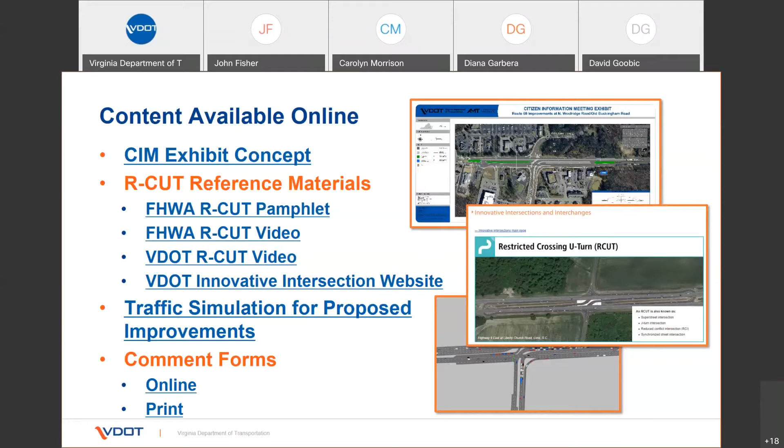Our project is located in Chesterfield County at the intersection of Route 60, Old Buckingham Road, and North Woolridge Road. We are proposing to improve the existing intersection by constructing a signalized restricted crossing U-turn, or RCUT. The total project budget, including engineering, right-of-way, utility relocation, and construction, is $13.2 million. If you send us an email, please include either the UPC or state project number so we can make sure the email is routed to the appropriate individual.

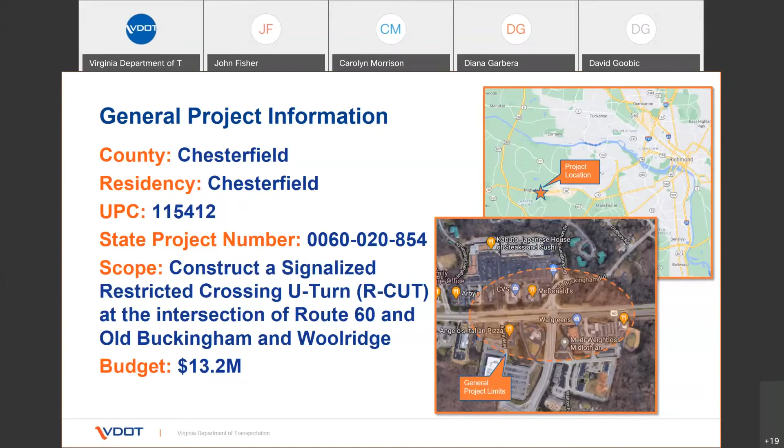Why are we proposing improvements for this intersection? This intersection already experiences frequent congestion, and there is an expectation that this will get worse. Woolridge Road at 288 will be connected to Old Hundred Road, and this will substantially increase the usage of this intersection. The intersection also ranks 15th in the Richmond District's 2018 ranking of the potential for safety improvements. There have been 116 crashes at this intersection between 2014 and 2018, and the majority of those crashes were rear-end collisions. This type of crash is typical for areas with traffic congestion.

Why did Chesterfield County and VDOT decide RCUT was the better choice for this location?

Out of the viable intersection modifications, the RCUT helps encourage the use of main roads, such as Route 60 east of the intersection. Old Buckingham was never designed to handle the large volume of cut-through traffic it currently experiences.

The RCUT also better supports the anticipated additional traffic expected from the southwestern portion of Chesterfield County that will travel past this area. We also considered the potential impacts to local businesses and determined the RCUT would have the least negative impacts over the alternatives.

The RCUT even provides a better gateway into the Midlothian village through the use of green space after the traffic signal.

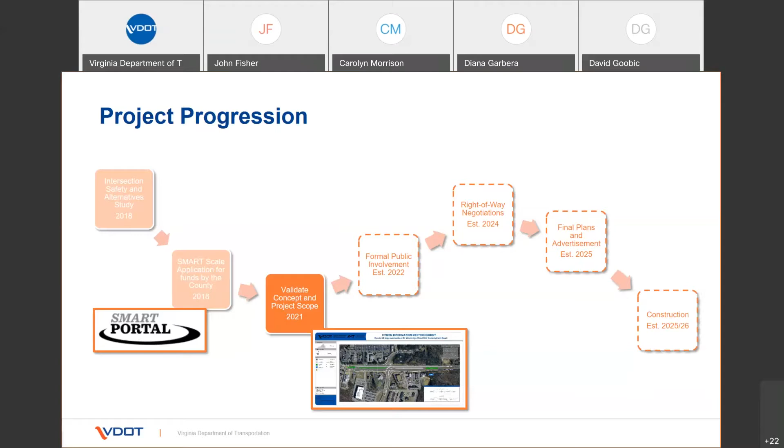What is an RCUT? The term RCUT is the abbreviation for Restricted Crossing U-Turn. This is an innovative intersection type where all side street movements begin with a right turn.

Why would we prefer this over conventional intersections? An RCUT has less crossing points than a conventional intersection, so it reduces the potential for vehicular impacts.

Also, by removing the side street left and straight movements, the number of signal phases drops from 8 to 2, resulting in increased efficiency for this intersection.

Increasing intersection efficiency also improves intersection safety because there will be less vehicles waiting to go, resulting in less rear-end collisions.

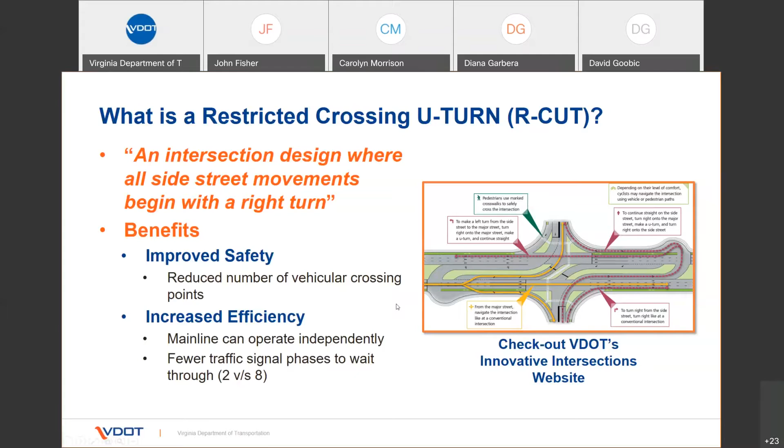So, what would change by installing an RCUT at this location? For the majority of the traffic movements, an RCUT intersection will function similar to a conventional intersection.

For example, Route 60 traffic traveling straight through the intersection will continue in a manner similar to a conventional intersection. Traffic on Route 60 turning both right and left onto Woolridge Road will travel in a manner similar to a conventional intersection.

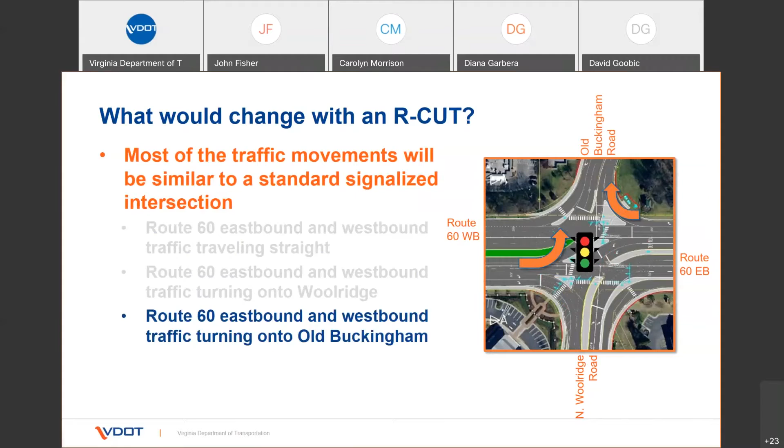Traffic on Route 60 turning both right and left onto Old Buckingham Road will also travel in a manner similar to a conventional intersection. And finally, traffic on Woolridge Road and Old Buckingham turning right onto Route 60 will travel in a manner similar to a conventional intersection.

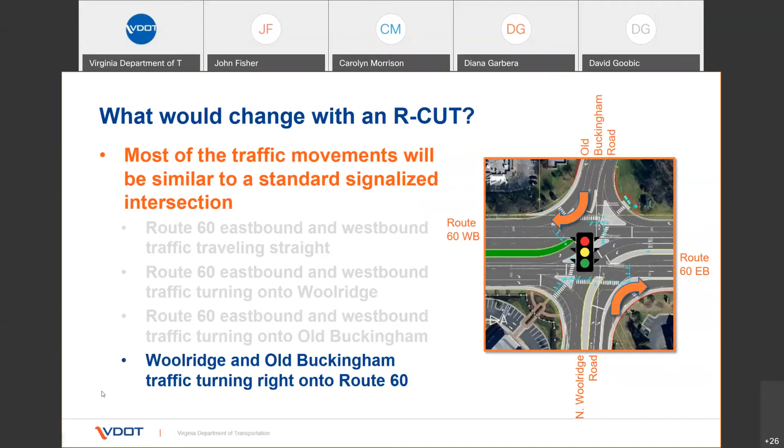As many of you have identified in your comments, there are still some differences. Traffic on Woolridge Road traveling straight through the intersection to Old Buckingham, and traffic turning left onto Route 60, will first turn right onto Route 60, then make a U-turn at a signalized U-turn immediately down the road. From there, traffic can turn right onto Old Buckingham or continue on to Route 60 westbound.

Also, traffic from Old Buckingham Road traveling straight through the intersection to Woolridge, and traffic turning left onto Route 60, will follow a similar pattern. The only difference is traffic from Old Buckingham will be heading west before making a U-turn at the signalized U-turn.

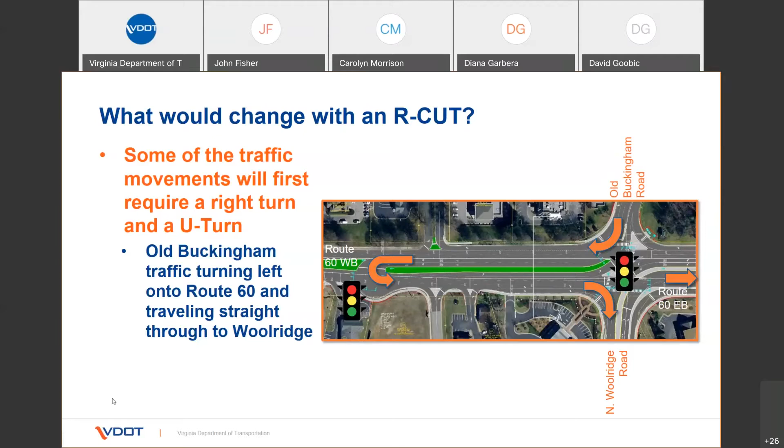So, how is an RCUT more efficient than a conventional intersection? A conventional intersection has 8 different traffic signal phases, so if you arrive at the intersection and watch the light turn red, there'll be at least 7 groups of traffic that you'll have to wait through before it's your turn again.

By removing the side street straight and left turn movements, the RCUT intersection only needs 2 traffic signal phases. Thus, traffic is able to move quicker, resulting in less time for you to wait before you get to go.

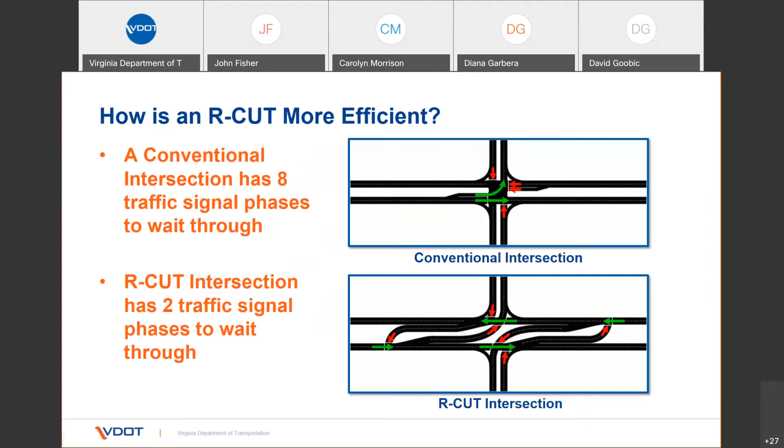As noted at the beginning of our presentation, we posted our CIM comment form on our project website, and we have received a lot of great feedback already. I would like to go over a few of the common questions as part of this presentation. I would also like to encourage everyone to visit the project web page to view the frequently asked questions for additional information.

Is an R-CUT really safer than a conventional intersection? This has been asked by many of you, and it is a great question. To help illustrate why, I would like to point out the two diagrams on the right.

As shown in the diagrams, a conventional intersection has 32 conflict points. Conflict points are where vehicles cross each other's paths, and this increases collision risk. The R-CUT intersection only has 18 conflict points, or half of the conflict points of a conventional intersection.

I would also like to remind everyone that the proposed U-turn movement at this location will be signalized. Thus, you will not be expected to make a U-turn into oncoming Route 60 traffic.

We also have a couple of examples of R-CUTs that have been constructed in other states. In both North Carolina and Maryland, improving the intersection with an R-CUT reduced the number of crashes and fatalities.

We understand that an R-CUT is a new type of intersection for Virginia, and there are concerns. We would like to point out that roundabouts were also a concern when they were new. Yet as people use them, drivers now are more familiar and have expressed their support.

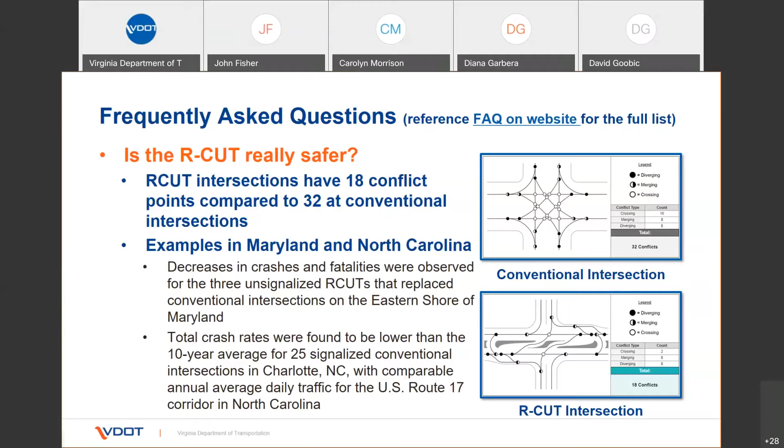How does this help the walkability of the Midlothian Village area? There are existing ramps at the current intersection corners, but no pedestrian crosswalk signals. Our proposed intersection will include crosswalks and pedestrian signals facilitating safer pedestrian movement through the intersection.

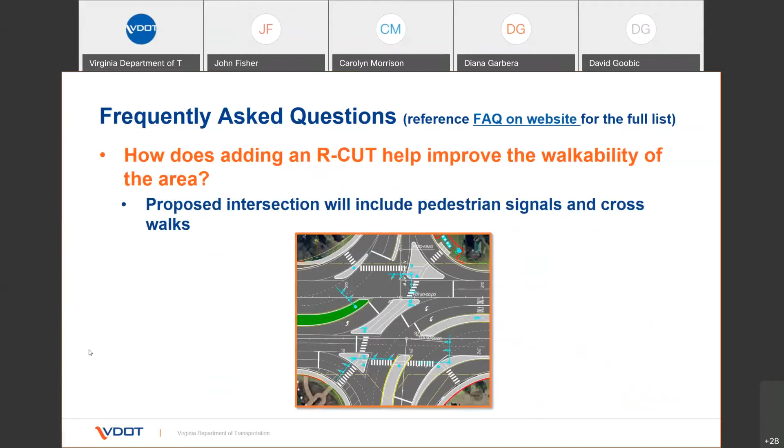How much longer will it take me to drive through this intersection? Because the traffic signal phases are reduced from 8 phases to 2 phases, the travel times are reduced for everyone during rush hour.

Outside of rush hour, traffic along Route 60 and traffic turning from Route 60 will still experience less travel time. Traffic from Woolridge and Old Buckingham traveling straight through the intersection or turning left may see a slight increase in travel time due to the increased distance, but will still benefit from the signal phasing reduction.

I would like to share the traffic simulation and ask everyone's patience while I switch screens.

As you can see on this video, the traffic signal phases facilitate movements through the intersection, including at the signalized U-turns, to decrease driver wait times.

As noted on the previous slide, this simulation is available on our project website for you to view at a later date.

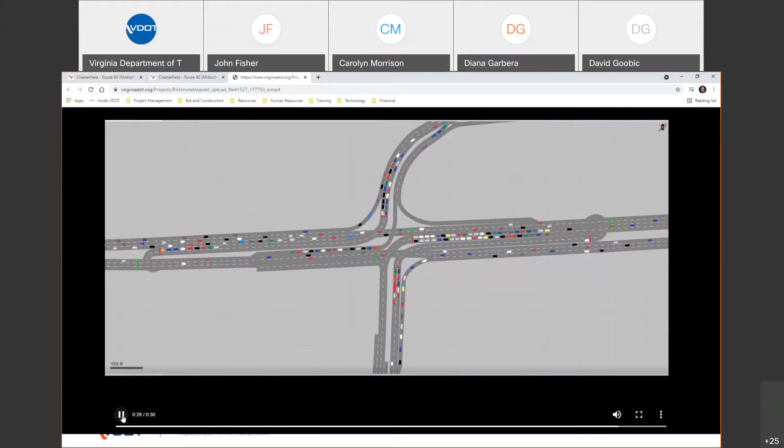How do I get to the village area businesses from Woolridge without having to use the RCUT? Including Lee Gordon Drive, there are currently 3 routes from Woolridge Road to Route 60 that avoid this intersection.

Before the RCUT construction begins, Grove Hill Road will be extended to Route 60 and Coalfield Station Lane will be connected to Grove Hill Road. This provides 2 additional routes to Route 60 from Woolridge Road, resulting in 5 separate routes that will be available.

When will construction take place? Construction is anticipated to start in 2025 and continue through 2026. Are long-term detours planned? None are anticipated at this time.

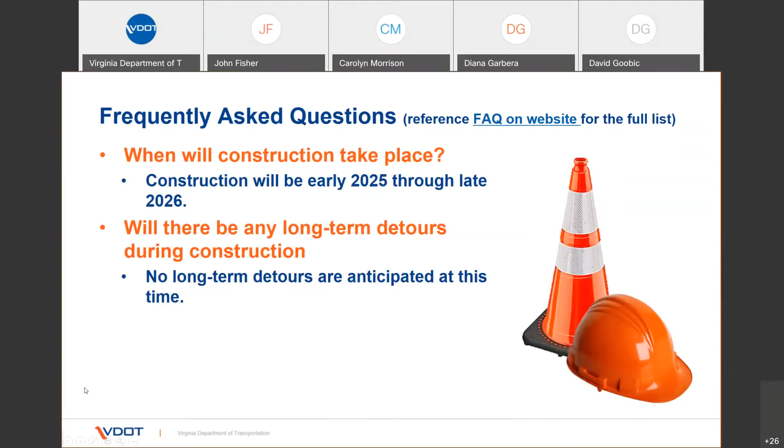I have a question about an area outside of the project limits. Please visit my.vdot.virginia.gov or call 1-800-FOR-ROAD to make the request.

Now, we would like to start our question and answer portion of today's meeting.

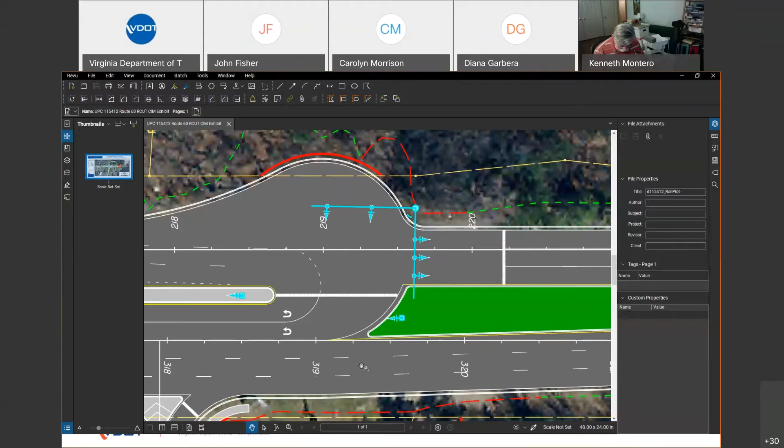There you go. So at this U-turn movement, this is the one east of the main intersection. The U-turn movement is signalized on both sides of the intersection. So you'd have a new traffic signal here, and then you would also have a traffic signal to stop 60 westbound traffic so that those vehicles could make that U-turn. So this traffic signal is really an additional one compared to a traditional intersection. You'd have the same on the other side, on the west side of the intersection, down at the other U-turn movement.

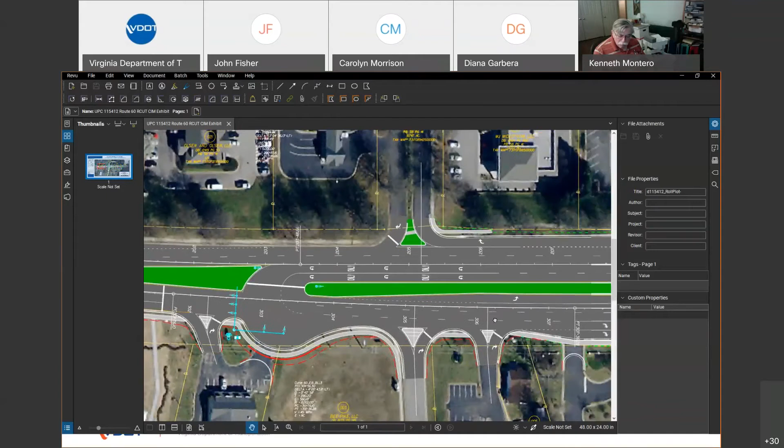And then we also have a dual signalized right turn lane from 60 eastbound to Woolridge southbound. You can show that one, Will. One reason we made this a signalized dual right instead of a free flow like the other three quadrants is the amount of traffic making this movement during the PM peak. What we found was there were so many vehicles.

Not only was there a long queue here, and that's why we made it a dual right turn lane, but there's a lot of weaving going on between - if we made it free flow - the vehicles coming 60 eastbound that want to then merge onto Woolridge southbound and eventually hang a left on Walton Park Road. There was a lot of weaving between those vehicles and the vehicles turning left from 60 westbound.

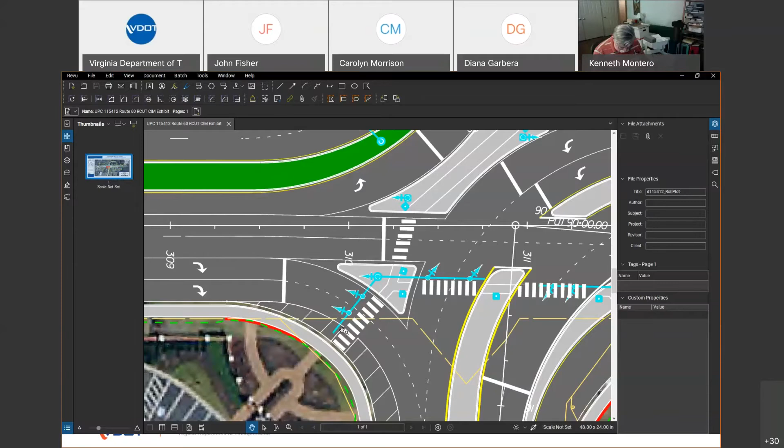So by signalizing this particular movement, this dual right turn lane, it allows a protected movement so that the vehicles from 60 eastbound to southbound Woolridge have an unobstructed movement to make a left turn either into our new left turn lane into Browns Way Road, which would be an entrance into the Walgreens shopping center, or to be able to merge over to the left to get into the dual left turn lane on Walton Park Road. So that was signalized really to protect the vehicles so that they wouldn't have to merge and cross over with the traffic coming from 60 westbound.

Thank you, Jeff. Becky, would you please ask the next question?

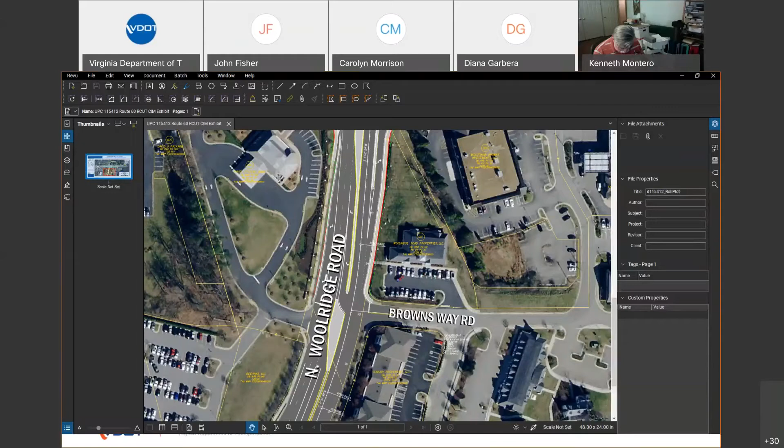If a pedestrian wanted to cross Midlothian Turnpike from the southwest corner by Walgreens and end up at the northwest corner by McDonald's, how many pedestrian-controlled signal buttons would they have to press? Are all sections of the crosswalk, including far right turning lanes, controlled by pedestrian signal buttons? What additional safety measures will be in place to keep pedestrians safe during their crossing?

That was a great question. I'd like to ask Jeff if he can help with that, please. And Jeff, if you need me to move the slide, please let me know. No, that's fine right there. So to get from one quadrant - I'll say the southeast quadrant - to the northwest quadrant, which would be the Walgreens quadrant, if you will, to McDonald's, there are 7 different crossings.

2 of them will be unsignalized, which would be the free flow right turn in the lower right-hand corner and the free flow right turn in the upper left-hand corner. That's 2 out of the 7. The other 5 movements are signalized.

So if you look down at the bottom of your screen, you'll see there'll be a push button actuation to get you across Woolridge northbound, another one to get you across from the dual lefts going Woolridge southbound, one that you'll have to cross 60 eastbound traffic - that's the 4th one altogether. And then you've got the long Z diagonal, if you will, in the middle of the intersection. And then you've got one that crosses westbound 60, another one that crosses Old Buckingham, and then an unsignalized one that gets you over to that other quadrant. So it is 7 traffic crossings total, and 5 of them will be signalized.

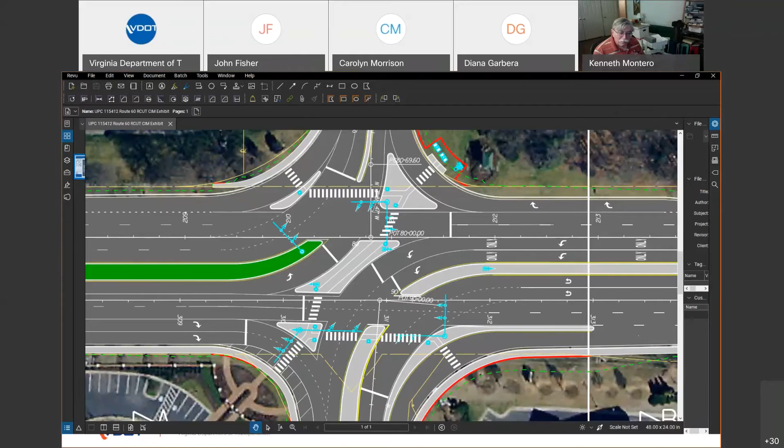Please share again the three additional ways to access Midlothian Turnpike headed westbound that you shared earlier. Also, is there a way to extend Walton Park Road at Woolridge to come out at Midlothian Turnpike westbound?

I believe this is the slide you're requesting we share. As far as extending Walton Park Road to Woolridge to come out at Midlothian Turnpike westbound, I'd like to ask Rebecca Worley to answer that. That's really out of the scope of this project, but there is a development project proposed in that southwest corner that would extend that Walton Park approach over to Grove Hill Road and would extend Grove Hill Road to come out and intersect Route 60. That development plan is called Coalfield Station.

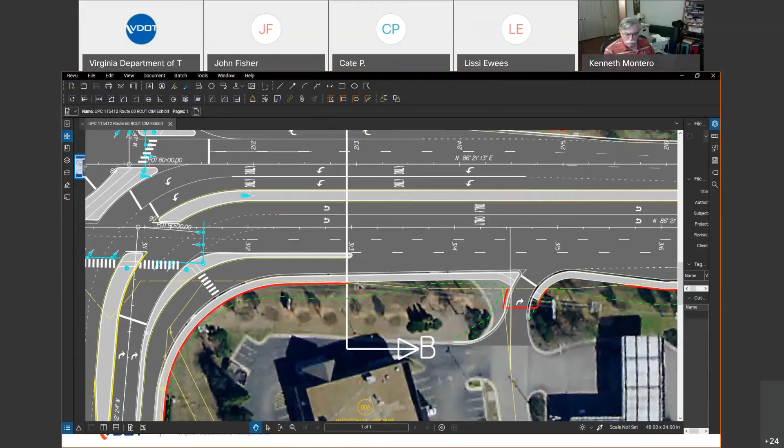You mentioned that Grove Hill Road will be continued through onto Route 60. This will no doubt cause through traffic to use Grove Hill as a cut through to avoid the RCUT. How will VDOT limit non-neighborhood traffic through the Grove?

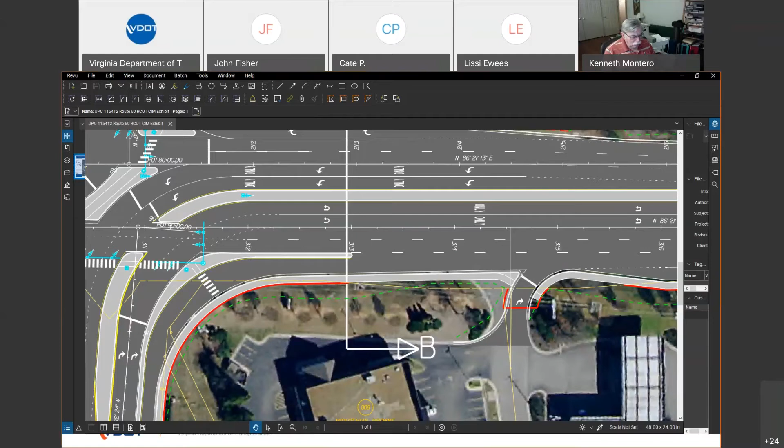Sure. So the extension of Grove Hill Road, as we've discussed, is not a part of this project, but a development project. I'll add that Grove Hill Road, currently where it connects with Woolridge, where it will be extended from, there's actually a roundabout on that section now. So I certainly think that will discourage some through traffic, as we've discussed before. As Jeff said, as people learn the efficiency of the route here, I don't think they will seek out those other options that may be slower routes to get to Route 60.

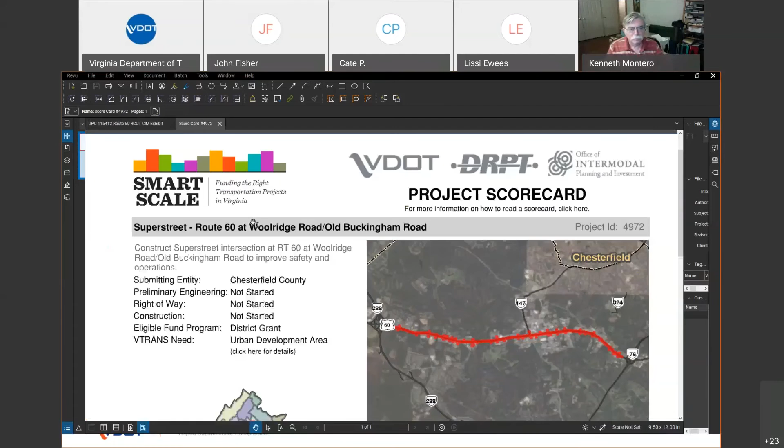So I think the operational question you're asking, if anybody else doesn't chime in after I speak, we'll certainly dig into that a little bit more for you. But I did want to point out that when we select these projects, it's not just about operations. It's a very diverse set of criteria, backed by state law, that judges projects against other projects across the state. It looks at everything from, as you're seeing on the screen, congestion mitigation to land use. So there is an operational safety part of this project, but there are a lot of other benefits that were looked at. There could be a cost benefit from an operations side, but there's also a cost benefit from the way Smart Scale judges, scores, and selects projects.

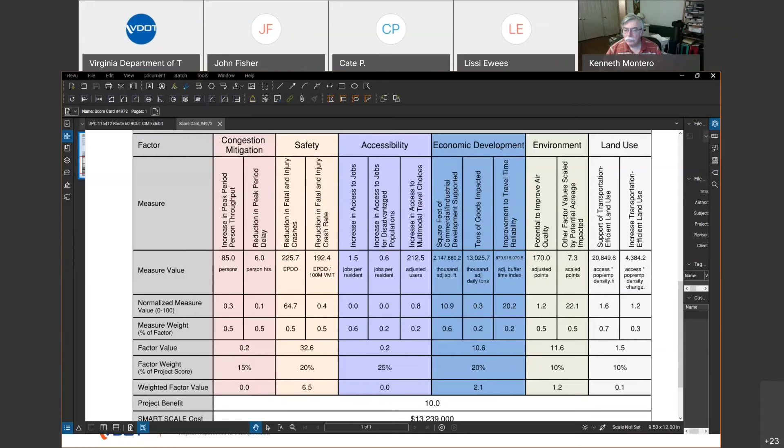This seems needless despite the reasoning given. What other alternatives were considered, and why is this superior to each one? Please spend some time detailing the reasoning behind not choosing the other alternatives.

I'd like to ask Rebecca and Rashmi to help me answer this one. I'd also like to point out that we may have to provide some additional information outside of the CIM. I believe we have time for some brief reasoning at this moment, but I think this is a better offline question for the detailed reasoning. Rebecca, would you be able to help with this?

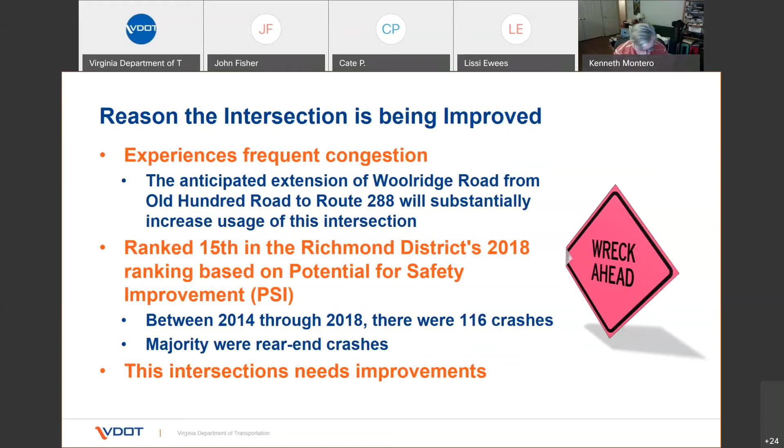Where will Grove Hill intersect Route 60?

It's a good question. I can pull up a set of plans. I can also ask if Rebecca can answer that, since she is more familiar with this.

Sure, well I couldn't quote the exact location where it's going to intersect. I'd have to pull up the development plans myself, but it will be further west of the RCUT intersection, closer to the middle school on Midlothian Turnpike.

If you give me a second, I can bring up the approved site plan from Chesterfield County. This may take a bit, this is a large PDF. If you have more questions about the details of the Chesterfield County site plan, please contact Chesterfield County as they have better access. Good, it's working.

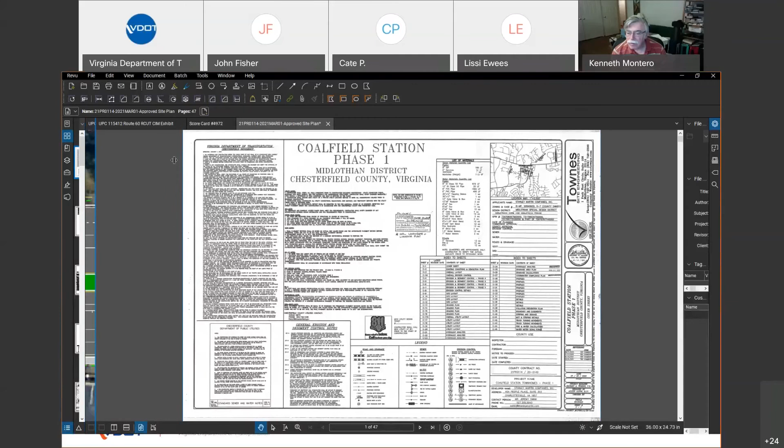According to the site plan, it appears that the connection point will be west of the barn. Just to clarify, that's not a VDOT project, correct? This is a private development project. We have a copy of the approved Chesterfield County site plan.

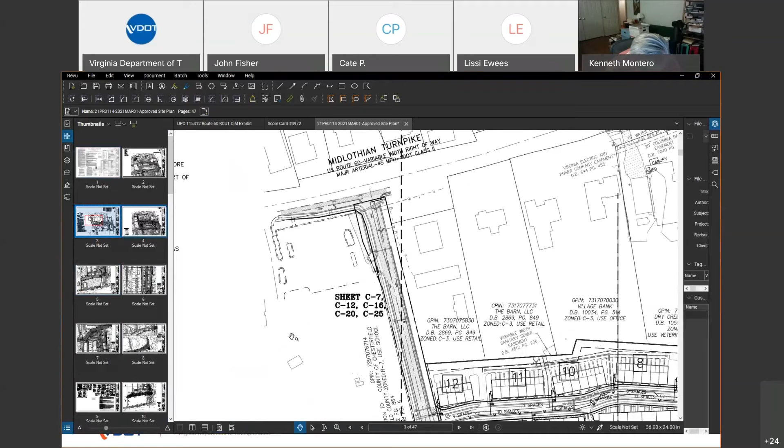Thank you. Becky, would you please ask the next question? Any idea on how maintenance of traffic will be handled during construction? It is a very busy location. I can't imagine a whole direction of travel being closed for prolonged time periods.

That's a great question, we understand your concerns. Jeff, would you be able to help answer this question?

Sure will. I think one thing that's really important to point out is a lot of the pavement, per se, that we're showing on this concept plan, that's the asphalt pavement that's out there today. There's very little impacts outside of existing right-of-way. So a lot of the pavement we'll be using for this project may need to be milled and overlaid. Maybe there'll be some nighttime activities and so forth, but a large portion of the asphalt we'll be using for these improvements is already out there today.

So yes, there'll definitely be some phasing of some of the movements and some of the traffic signals. We'll have to have the traffic signals in place to make those right turn movements down to the U-turns and so forth, and to build the bump outs for the U-turns. But all of those things are outside of existing traffic.

Where we do have the concrete medians, we'll be paving those the whole way across so that we'll be able to shift traffic back and forth. One of the last things will be done will be to come in and build those concrete medians on top of the existing pavement that's there. So we certainly do not anticipate any total road closures. You're not going to see 60 eastbound or 60 westbound closed to traffic at any point.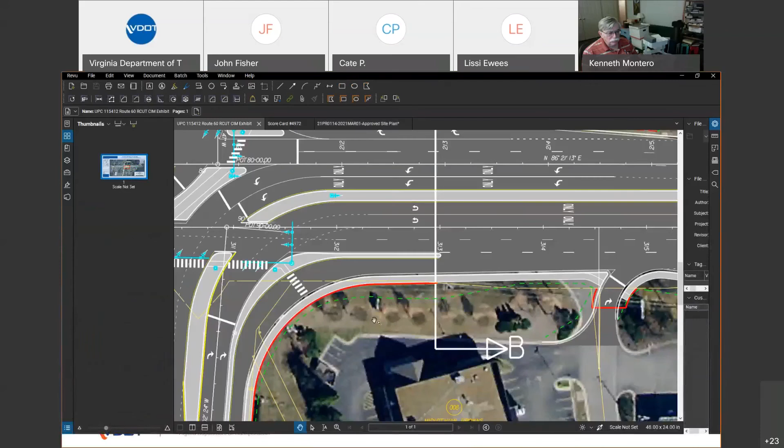It's a great question. Jeff, I believe you started answering this question. Would you provide some additional insight?

Sure. One of the biggest things we saw with this movement was a heavy amount of traffic from folks coming from 288 in the PM peak that wanted to make a right turn onto Woolridge Road. We also have a very heavy left turn movement on westbound Midlothian Turnpike at the main signal. What we were trying to prevent by signalizing this dual right turn was a weave, where you have a heavy right turn movement destined for Woolridge southbound and a heavy left turn movement from Midlothian Turnpike westbound to Woolridge southbound, creating a situation where someone in the right-hand turn lane has to weave across two or three lanes of traffic to get into the left turn lane to make a left down at Walton Park Road.

So by signalizing this, we're giving folks traveling 60 eastbound who want to go to Woolridge southbound a protected movement. When they get a green light, those two lanes will have full access to the lanes southbound on Woolridge.

So they can either use the inside lane to make a left turn into the Walgreens shopping center, like we discussed before, because if you want to go to Walgreens, you can't go straight through the intersection and then turn right. You'd have to turn right at this signalized intersection.

But the main reason is to eliminate the weave with traffic coming from westbound 60 to southbound Woolridge, so that we don't have six or four lanes of traffic all trying to get into the dual left turn lanes onto Walton Park Road.

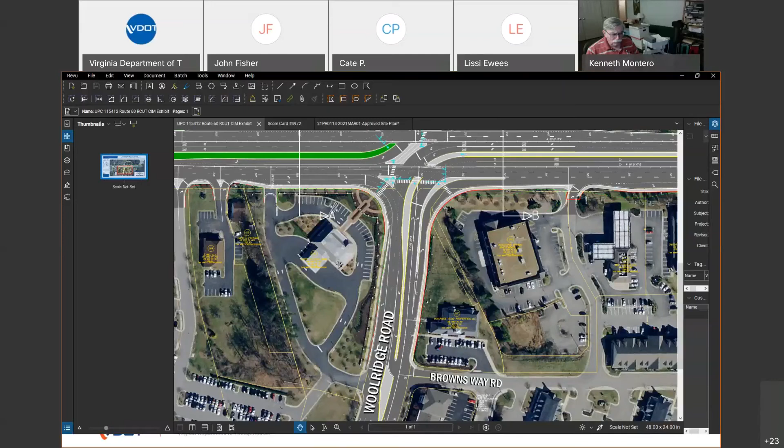Slightly outside the project area on Old Buckingham Road, starting from Gates Antiques going to the Food Lion, there's a pedestrian footpath where you can see a consistent level of pedestrians walking through the grass. Could the project include a sidewalk extending up Old Buckingham towards Falling Creek? Thank you.

Great question. I'd like to ask if Jason can help with this question.

Well, the purpose of this project is to deal with the intersection, and we do have a fixed budget. That's all we can get funding-wise. There is no flexibility to get more money based on the smart scale system.

Usually our goal is to accommodate the pedestrian. If there is a pedestrian route, it's certainly to provide a mechanism for them to be safe. If that's a sidewalk, we would provide that within the limits of our project, but we would generally transition that back to the existing situation as quickly as possible when we depart from the intersection.

So it's a great question, and it's one of those things that Rebecca Worley can track with the county to decide if it meets the needs for another additional project down the road.

Thank you. I've put up the slide noting this has been a frequently asked question about areas outside of our project. The PDF of the presentation has links built into it, including a clickable link to the virginiadot.org website.

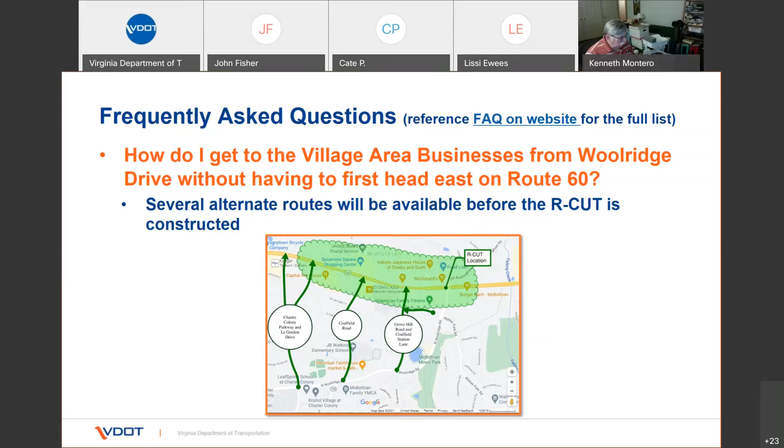Sure. Well, what we're trying to do with this intersection, I think, as a couple folks have said earlier, this is really about trying to balance the best solution for this intersection. What we're trying to do is mitigate a very heavy AM, PM peak hour traffic east and west on the Midlothian Turnpike. Also make it a lot safer than what it is today, not just for vehicles, but for pedestrians as well. Even with what we're planning here, it may look like a circuitous route, so to speak, to get from one side of the intersection to the other. But today, there's no accommodations at all. So even what we're presenting with this design is better than the current situation today. And it's all about coming up with a good balance for this intersection. It's about improving safety. It's about being able to address the 2038 design year traffic, which is going to be significantly more than what it is today.

The study that was done previously selected this as the preferred intersection type to be constructed here, to address all those future considerations, including pedestrian, safety, and traffic. You can't really point at one thing and say this is better or worse. As a whole, it's a type of intersection that will address all the different needs, from a safety standpoint, a vehicle standpoint, and a pedestrian standpoint, in the near and far future.

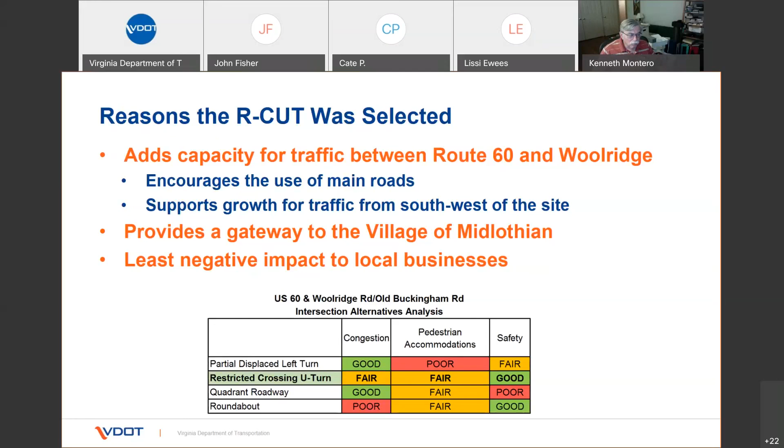All right, I'm going to keep going for 7 more minutes, or? Well, we do need to conclude the meeting. There is actually some things I'd like to go over at the end. Okay, so...

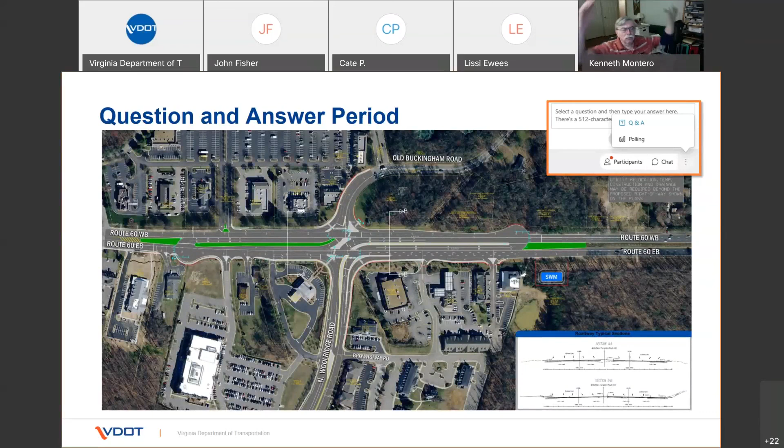I'd like to say this concludes the question and answer portion of our virtual citizens information meeting. As noted in the beginning of the presentation, we are soliciting your feedback early on our project. We have set up a CIM comment form and provided it in both a printable and online format. I would like to switch screens to show you the project website and where to find both versions of the comment form.

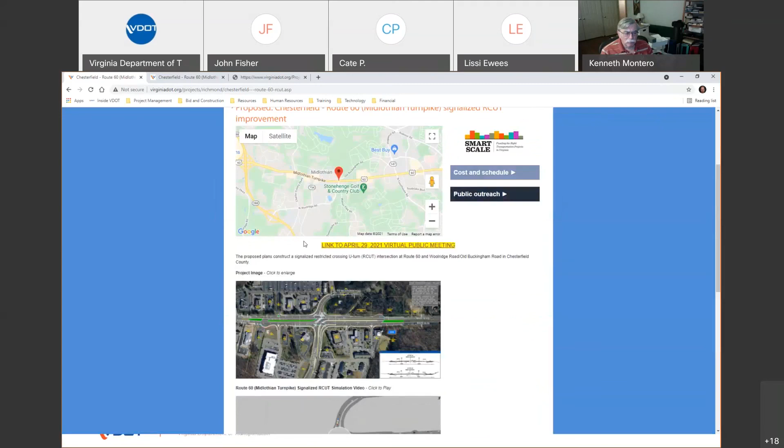As shown on the screen here, this is our project website. Near the bottom of the website are the links to the online and printable form. By clicking on the link to April 29, 2021 virtual public meeting, you will also open the CIM website. At the bottom of the CIM website is additional access to our CIM comment form.

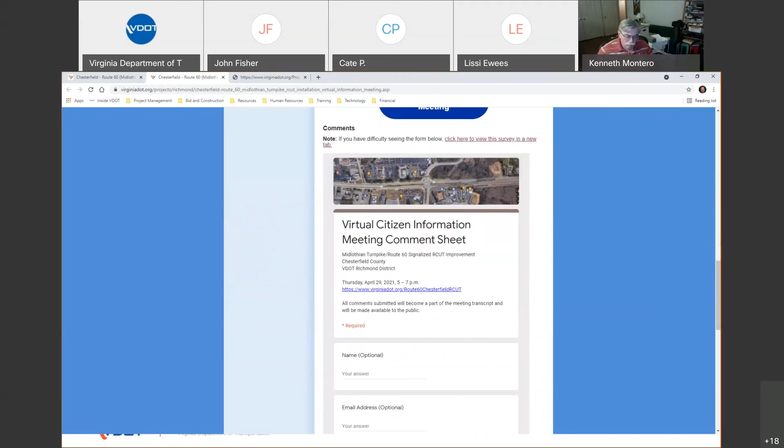The CIM comment period will close May 9th, 2021. If you are using the printable version of the form, please make sure it is postmarked by that date. Please note, this does not mean we are no longer accepting comments, but those comments will not be included as part of the CIM report. The online form will be switched back to our general comment response form, and you may also email us with your questions. Finally, we'll have a formal public hearing in 2022, and we'll be presenting a refined concept for your additional feedback.